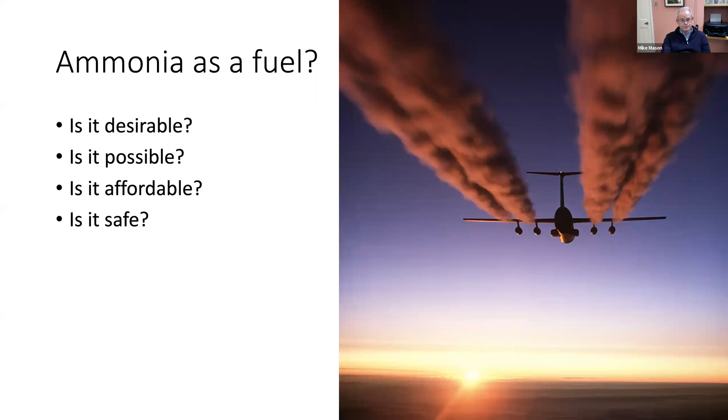Is it desirable? Well, this is why it's desirable, of course. Climate change, we all know climate change is a rolling catastrophe. It's on us already. And what's the problem? Well, we're already suffering from severe problems, and yet we're only just over 1 degree centigrade above pre-industrial temperatures. The IPCC is setting some targets. It produced a report around exceeding more than 1.5 degrees above background temperature. And even that is probably too dangerous, but it's an acceptable target. But we're bound to overshoot that. We guarantee we won't hit that without having to do a little bit of a reverse.

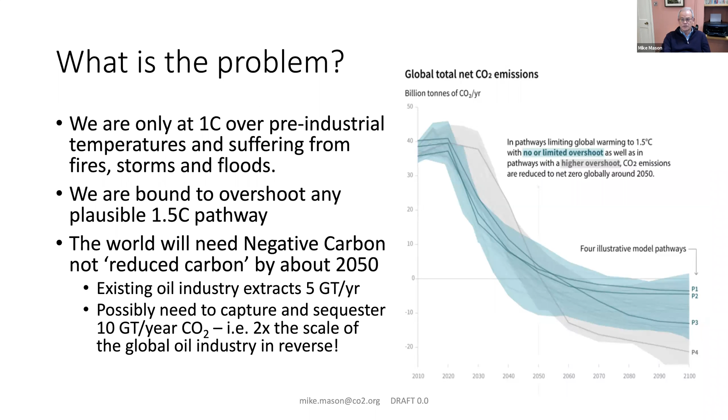But it's more than CO2 if you're talking about aviation. NOx is an issue for turbines. It's a real problem. And we have a massive uncertainty around cirrus clouds. Ice in these clouds has a huge impact on radiative forcing, and it's largely seeded by the soot particles in combustion gases. So anything with carbon in is going to be a problem there.

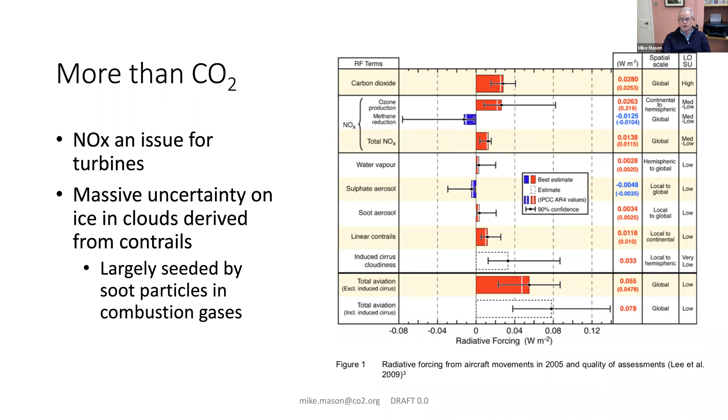So what possible energy vectors have we got for the future? Well, on the top right, you've got kerosene. The scales here are logarithmic. You've got volumetric energy density up the y-axis, gravimetric on the x. Batteries are way too low. Future possible batteries are there, that purple mark. They're not actually likely to have much of a role outside a very limited amount of recreational flying.

Hydrogen's really interesting. There's liquid hydrogen, way off the scale in terms of gravimetric energy density, not bad in terms of volumetric energy density, but that's a liquid at 20 Kelvin. If you want to actually store that sensibly, you end up here. So that's the US government target for practical storage of hydrogen. And you can see that it's a long way from where kerosene is. So hydrogen might have a role in some aircraft, but it's nowhere near as good as kerosene.

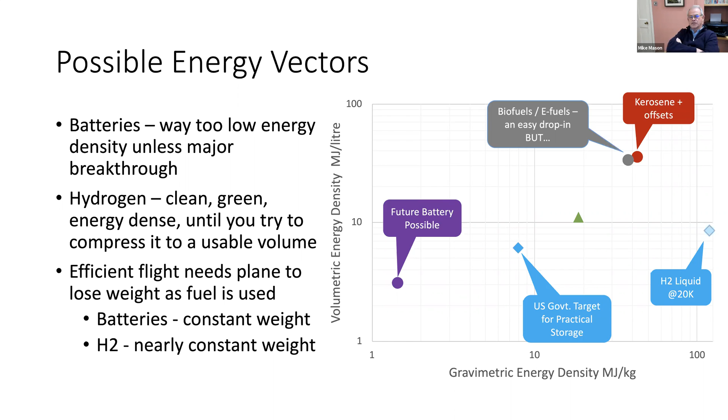So then this is the one that I hear so often being repeated by the aviation community. Ah, yes, but we'll use biofuels, we'll use e-fuels, synthetic fuels. They're an easy drop-in. But by 2040, 2050, we're going to be, as I said, negative CO2. Hold that in your mind for a second. Every ton of a carbon-based fuel emits 3 tons of CO2. Let's ignore, conveniently, the radiative forcing created by contrails and NOx and all the rest of it.

3 tons of CO2. If I just look at business as usual emissions projected for somewhere around the 2040, 2050 time horizon, they are going to be, from aviation, 2 to 4 billion tons a year of CO2. Now, if we've already got to capture and bury 10, this adds 20 to 40% to the global CO2 capture needs. And remember, that's almost as much as the entire oil industry today. This is a huge ask. It's going to be very difficult to do.

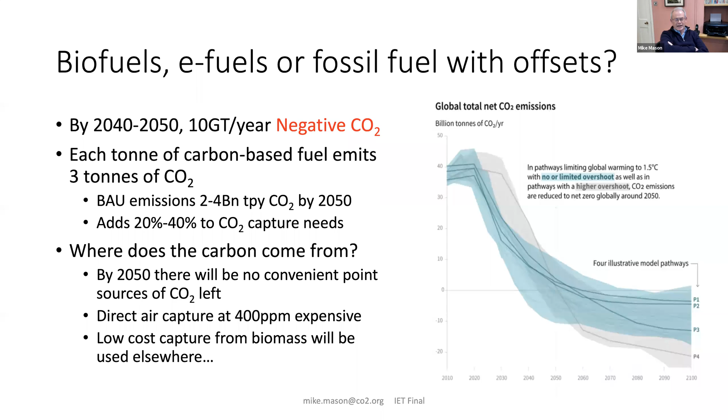Where does the carbon come from? So people say, oh yeah, but we can use flue gases, we can use this, we can use that, we can use the other. But by 2050, there will be no convenient point sources of CO2 left. There won't be any flues, there won't be any steelworks producing it, and cement works will have to bury their own CO2. So that says, well, maybe we can use biomass. Biomass is our get out of jail free card. We can capture it with biomass.

Except, let's just contrast 2 different approaches here. One is to use oils directly. So a ton of palm oil is roughly equivalent to a ton of biofuel. I don't really mind what you get it from. Palm is the most efficient source of oil. And what we see is that because you end up having to deforest, in essence, every incremental ton of vegetable oils has a total CO2 emission penalty of 11 tons. So not 3 tons that you have to capture, it's now 11. And of course, you also have the biodiversity losses. I don't think anyone's going to let you do that at any kind of sensible scale.

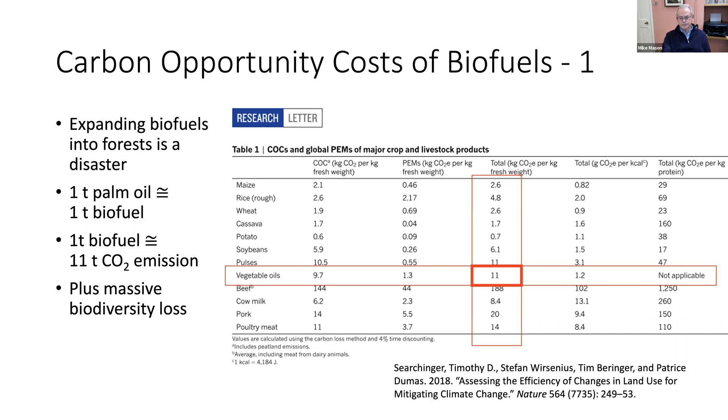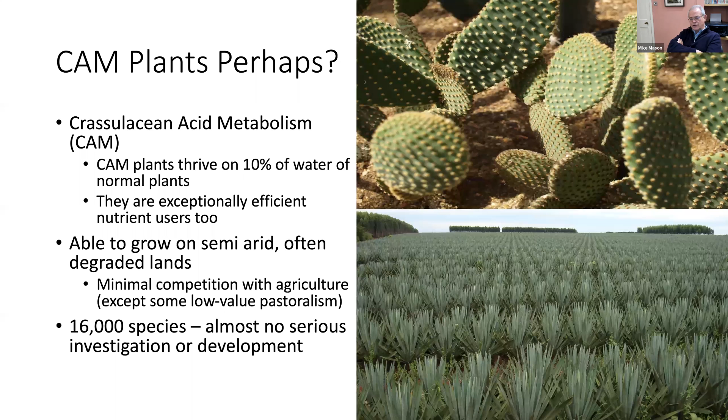So as Sean said, my DPhil was in microbiology, and I was looking at CAM plants. This is a really interesting group of hyper water efficient plants. They grow in semi-deserts. They're cacti, they're sisal plants, they're agave. You might know Agave tequilana is used for making tequila. They're incredibly efficient nutrient users. There's lots of land we could grow them on, and there's 16,000 species, and we probably only really learned how to commercialize 3 or 4. But they too have their opportunity costs.

Anything that we can ferment, we can convert to protein as an animal feed or even as human feed. And we do this bacterially. There are various Ralstonia species which produce 70 to 80% of their dry biomass weight as protein. And this is a good protein. It's more or less equivalent to casein milk proteins.

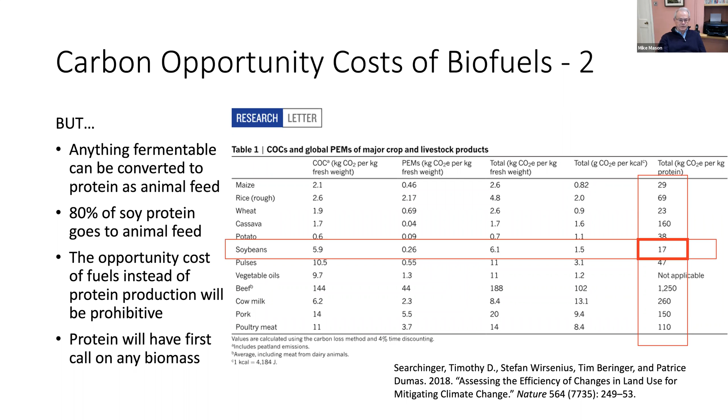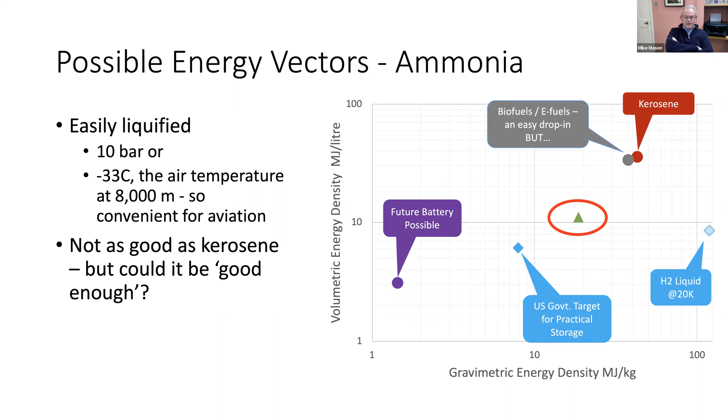So that leaves you with the last of the potential energy vectors, which was ammonia. It's very easily liquefied, 10 bar or minus 33 centigrade. It's not as good as kerosene, but the question is, could it be good enough? So is it possible?

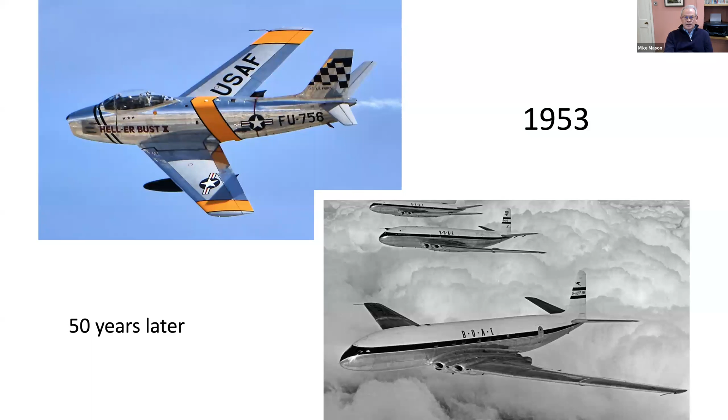1903, that was where we had. 50 years later, we were into the jet era. It is astounding the transformation that you can create in the space of 50 years. Another 50 years later, outside commercial civil aviation, we were doing some other really quite exciting things. On the other hand, in the 50 years from 1969 to 2019, we added a few windows on the top deck of a jumbo jet.

The trouble with civil aviation is that you're sitting on the peak of a mountain, and almost every development that you do takes you downhill. It is very difficult to improve on what you've got without essentially getting off the mountain and moving yourself onto another one. It needs some very substantial change.

So what I've done is I've built an indicative model. This is not a prediction, it's not a plan. It's a possible roadmap to truly sustainable aviation, just to demonstrate that in principle, these things are possible. So I've taken an A320 B737 class airplane. I've presumed moving it from turbofan to propeller.

That plane there is a Bristol Britannia. That's actually the second plane I flew on. The first plane was a DC-3, and then we used to fly on these. Beautiful airplanes. To do that, though, you'd probably need to drop the speed from about Mach 0.85 to about Mach 0.45, 480 kilometers an hour, 300 odd miles an hour. You could probably go up a little bit higher than that.

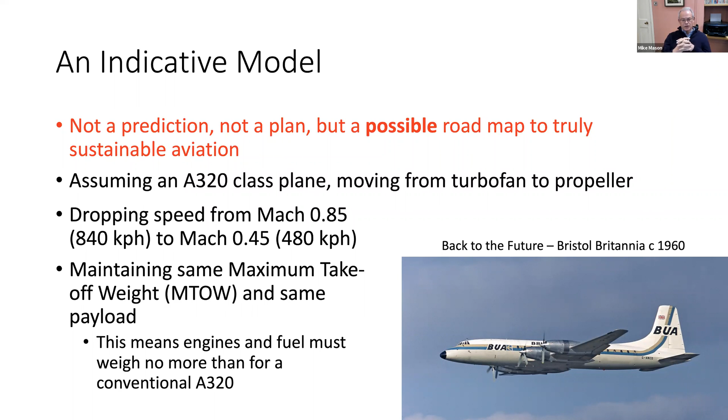Let's assume we have to have the same maximum takeoff weight, the same payload, and fundamentally the same aerodynamics. I mean, the positioning of engines and things will change, but I'm not for the moment assuming any dramatic changes in the aerodynamics. So your engines and fuel must weigh no more than for a conventional A320 if you're going to carry the same payload.

So what do you have to do to adapt to ammonia? Well, ammonia has 40% of the energy content per kilo of kerosene. If you're going to electrify that, solid oxide fuel cells, which are capable of turning ammonia into electricity, are currently quite heavy, though actually, in truth, nobody has ever asked the solid oxide industry to lightweight their fuel cells. If you swapped out steel for titanium, if you halved the thickness of it, if you did all sorts of things, I think we could go from about 0.3 kilowatts per kilogram up to a kilowatt per kilogram without too much dramatic change.

PEM cells are a lot better, proton membrane cells, but they're destroyed by even traces of ammonia, so they're challenging. If your fuel cells are heavy, however, you have a problem, which is that you want to size them for the cruise when you're not using as much power as in takeoff. Your takeoff power is severely limited by the mass of cells, so that's a challenge.

So what are the fixes? Well, the first, as I've said, is I think to move to propeller rather than jet, which increases your propulsive efficiency. You also need to move to electric power rather than combustion in the cruise, because that increases your mechanical and thermodynamic efficiency. And I'm postulating a hybrid solution using a turbine, an APU, basically to generate more power during takeoff and climb. You could burn ammonia, you can do all sorts of things. I'll talk more about that in a moment.

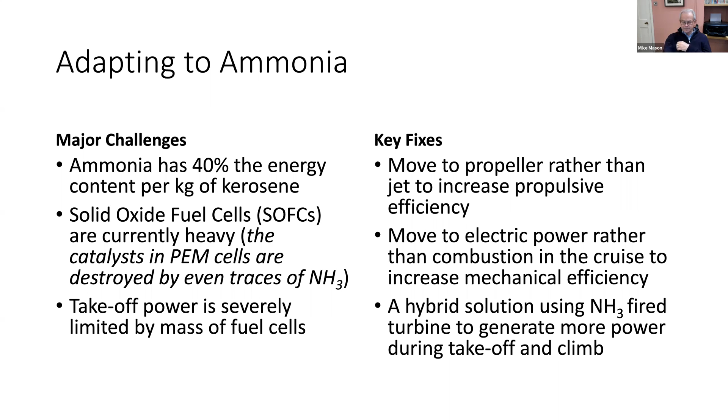So here we've got two graphs. On the left, we've got comparative energy use in megawatt hours per 1,000 kilometers per engine for your A320. On the right, we've got the same data turned into mass. If you look at the left-hand graph, we've got three things: a turbofan, 60% fuel cell efficiency, and 70% fuel cell efficiency. And you can see the delivered energy in each case is the same.

The propulsion losses are lower for the fuel cell approach. Electrical mechanical losses are tiny for the fuel cells and huge for the fan. And the fuel cell losses are there.

Convert that to a mass flow at 60%, which is, I guess, where fuel cells are likely to be today. What you see is that the fuel cell approach requires a much higher mass flow rate than burning kerosene. You won't get as far with the constraints we've put on it. At 70% fuel cell efficiency, you're pretty damn close. 70% takes you almost to where you need to be.

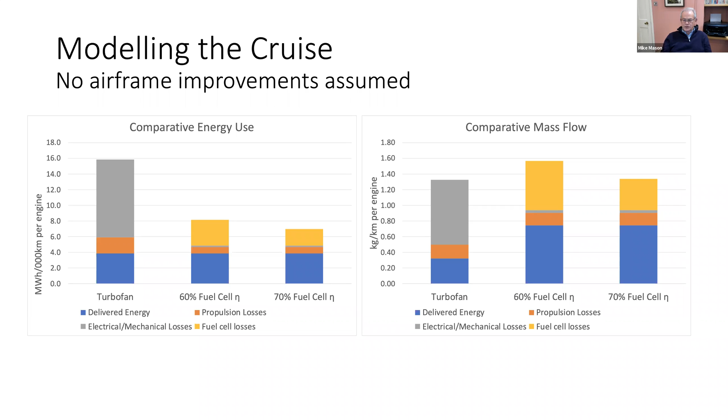Takeoff and climb, though, is a major issue. You need additional power to gain height, which is proportional to the rate of climb. You can get that from electric motors. Electric motors are not a problem. They're incredibly power dense, and frankly, you can run your electric motor way over its nominal power rating for a short while. It just gets quite warm. So long as you cool it off afterwards, you're all right.

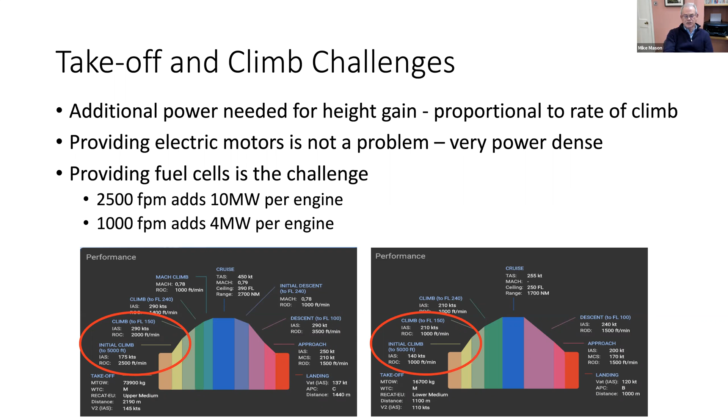Fuel cells are the challenge. At 2,500 feet a minute climb rate, which is typical for that class of plane, you need to add 10 megawatts per engine compared to the cruise. Whereas if this is an ATR or something, a little turboprop at 1,000 feet a minute climb rate, you only need to add 4 megawatts, which is a much more reasonable amount. So you're probably going to end up with a much slower climb, but it'll be a quieter climb.

The simplest solution to that extra power, I think, is probably a turbine, somewhat similar to an APU. It could burn ammonia. There might be an emissions problem without an ammonia to hydrogen cracker. The problem with burning ammonia is that for a brief instant, you have nitrogen free radicals hanging around where there's oxygen. The thermodynamics drives the reaction towards N2 plus H2O, but these are equilibrium reactions, and you may well find yourself with a little bit too much NOx in the exhaust.

Interestingly, if you just introduce a little bit of ammonia in the back end of the exhaust, the ammonia reduces the NOx back to nitrogen, but that's a separate approach. You could even burn a little bit of biofuel or e-fuel because you only need a relatively small quantity. Efficiency isn't a major issue there, since you only need it for 20 minutes of the flight. So your fuel and efficiency are much less important than for the cruise. And of course, turbines have a very high power to weight ratio.

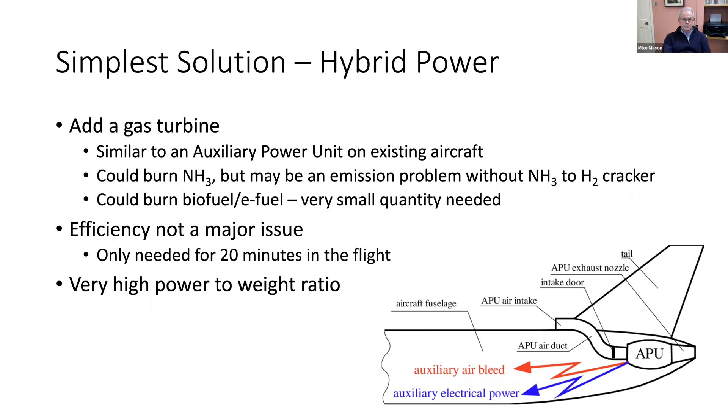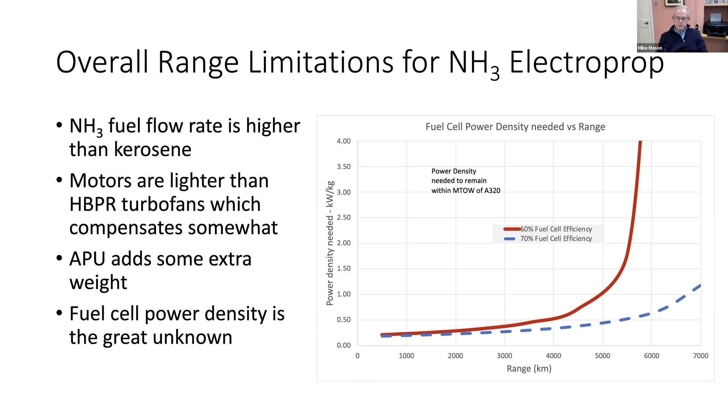No reserves clearly in there, so take it with a pinch of salt. Push the fuel cell efficiency up to 70%, and you're talking about a range of almost 7,000 kilometers. That's quite a big difference. In practice, that's what it means — you can get an awful lot of the world included in your range.

So the prize is huge. It would be quieter, it would be non-emitting. Aviation could become the most sustainable form of transport. You don't need much land take, a lot less than rail or road. No intrusive noise, and it'll be a lot faster and safer than all the alternatives. It's flexible and responsive—once you've built your railway, you can't move it tomorrow because demand patterns have changed. And it has unlimited growth potential. You could move aviation from ecological, environmental pariah to a saint, a savior.

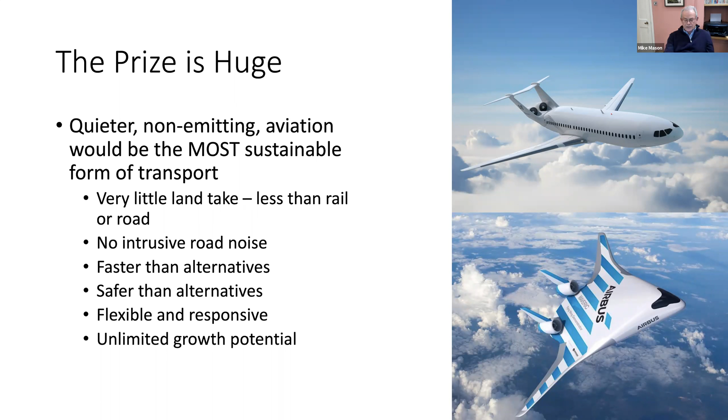Range is lurking there as an issue, but I'm going to be bold and say we've got to move off our mountain onto another one.

I've got a little commercial drone from DJI, and I can position it within 100 millimeters in 3-dimensional space at the touch of a button. The software for doing these things is easy.

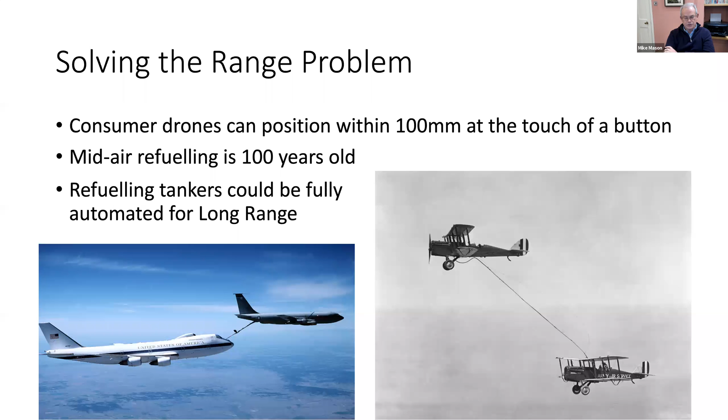Mid-air refueling—look at the picture on the right, it's 100 years old. And the President of the United States, bless him, flying in Air Force One, regularly refuels. It's safe enough for him, it's probably safe enough for everybody else. Don't underestimate what artificial intelligence, increasing computer power, and vastly improved control systems will do to safety and our ability to do things like this. It's not as silly an idea as it might first seem.

So then is it affordable? It's all very well having the technology, but who's going to pay for it?

The cost of ammonia is mostly electricity, and then it's the cost of electrolyzers. To make green ammonia, you take water, electrolyze it to produce hydrogen and oxygen, then combine the hydrogen with nitrogen from the air in a process called the Haber-Bosch process. That's 120 years old and pretty efficient, though quite capital intensive.

Solar power in sunny deserts is already $13.50 a megawatt hour—fairly low cost. Perovskite tandem cells are being developed at the moment. They'll probably be launched this year, and they will reduce the cost of solar power to less than $10 a megawatt hour by 2030. That's almost free.

Generation 3 ammonia is really interesting. This is coming out of a lab at Monash University in Melbourne, Australia, led by Doug MacFarlane, and he's developed a technique for producing ammonia directly in the electrode of the electrolyzer. So the whole Haber-Bosch process goes away.

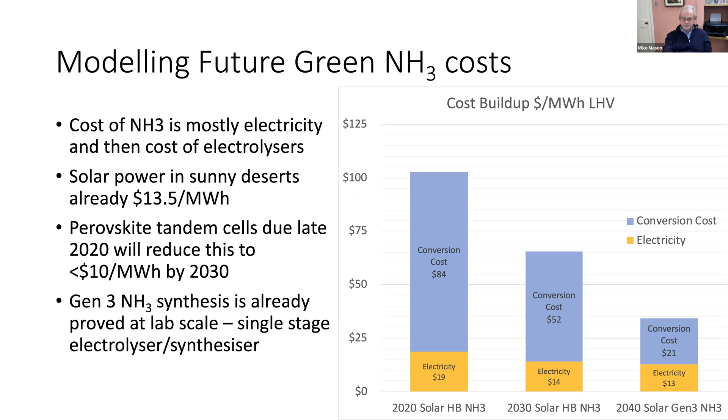So what does that mean for your aircraft? The inset graph at the bottom shows the fuel cell efficiency, a reminder of what is making this happen. On the graph on the right is the delivered energy cost, bearing in mind the different fuel cell compared to combustion efficiencies. I've used 60% efficiency.

You've got 3 lines there and 2 dotted lines. The red dotted line is kerosene without any CCS today—that's a 2020 price. Kerosene today is unbelievably cheap because nobody wants to buy it, since no one's flying their aeroplanes, so aviation fuel is almost being given away, but that's the price today. The green dotted line is the price of kerosene with $100 a ton of CO2 added.

The purple line shows you the cost per megawatt hour of delivered energy at a given cost of capital for producing that delivered energy, shown on the x-axis. You can see that ammonia is today more expensive than kerosene, and it would need a fairly chunky carbon price to make it viable.

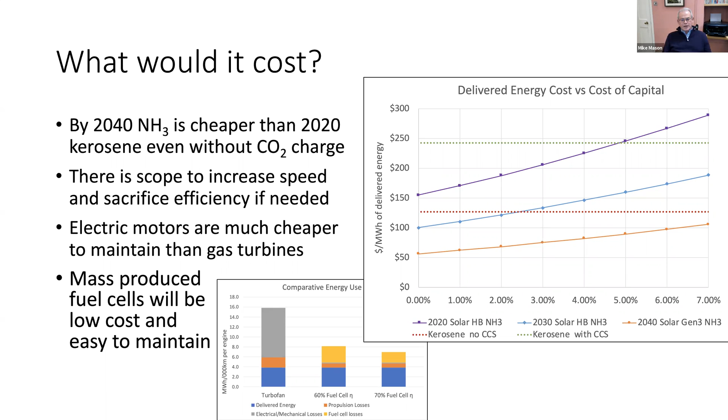But of course that's not the only thing. Fuel is a huge part of this, but electric motors are not like big gas turbines. They're dead cheap to run. They don't need maintenance—either they work or they don't work. Fuel cells have very few moving parts; the fuel cell itself is solid. So I suspect maintenance is also going to come down dramatically.

So there is the case for doing it and for paying it. The really difficult question is: is it safe?

The first thing we have to think about is fire. Since the explosion in Beirut, I've had countless people saying to me, yes, but that was ammonia, wasn't it, that blew up on the docks in Beirut? No, it wasn't—it was ammonium nitrate. I'm originally, as Sean said, a mining engineer. Ammonium nitrate is an explosive; we used it to blow up things.

Ammonia itself is almost completely non-flammable. It requires a high ignition energy and has a very narrow flammability limit. The quote there is from the IIAR Handbook of Ammonia, which notes that ammonia is designated as a non-flammable gas for shipping purposes by the United Nations and the US Department of Transportation. It is very, very difficult to set ammonia on fire by accident. Being a gas that's lighter than air, it diffuses readily, so it's very difficult to create a flammable situation outdoors.

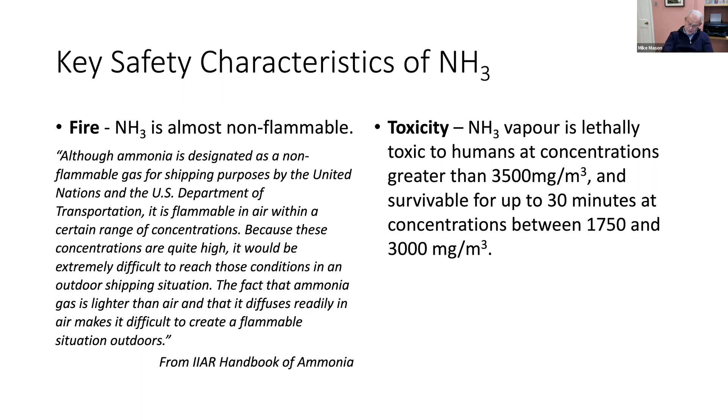Fire risk is dramatically reduced compared to kerosene. So in accidents at height, or accidents with no survivors, ammonia poses no additional risk. There are two types of accidents that really matter: survivable crashes, and crashes into populated areas. The key questions are, how large are the risks and can we mitigate them?

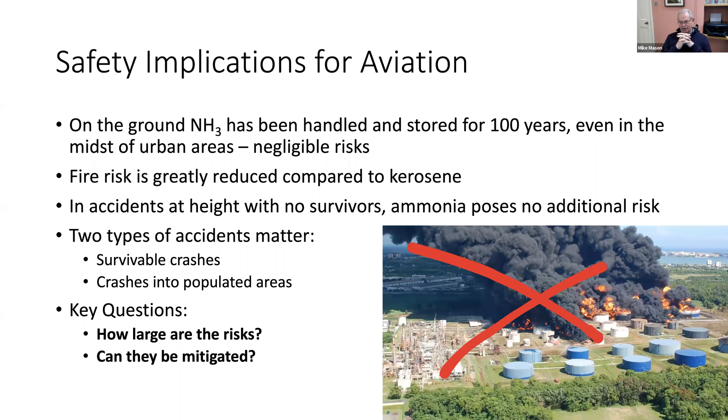As an answer to this, over the last lockdown I analysed every single civil aircraft and cargo aircraft crash over the last 20 years, 2000 to 2019 inclusive. It was clear, first of all, that trying to do this per billion passenger kilometers was the wrong metric, because nearly all the crashes happen on arrival and landing, or on departure, takeoff and climb. So it had to be per passenger journey.

What we can say is that regardless of fuel, the risks are falling fast and will continue to do so. Any ammonia-powered aircraft will be new, and will benefit from massively improved AI, control systems, and the increasing reliability of electric motors. Unlike a combustion motor or a jet, where increasing the size increases the efficiency, there's no efficiency gain from going bigger and bigger with electric motors—so there's no particular power-to-weight ratio gain from scale. That means you can easily have half a dozen 3-to-4 megawatt motors distributed across the aeroplane rather than two large combustion engines.

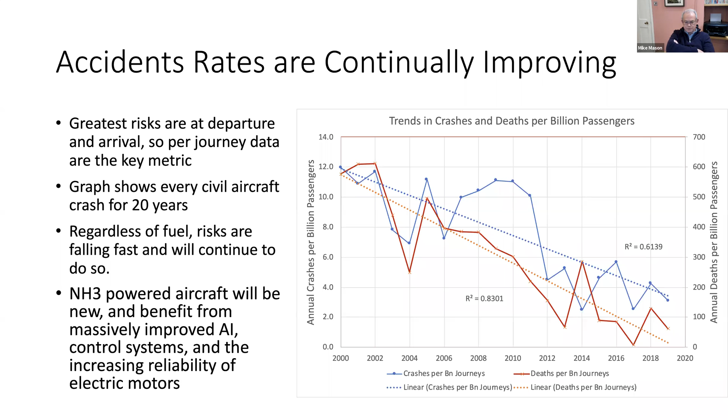Looking carefully at the risk in survivable crashes, because we've already agreed the unsurvivable ones aren't really important, and looking at those where there were survivors at risk, there are an awful lot you can eliminate because they're runway excursions with minimal or no fuel tank damage, so no survivors at risk in particular. Many crashes involve fires. It was remarkable how often in the crash reports you heard rescuers on the ground saying they could hear people alive and couldn't get in because of the fire. This we can dismiss as a problem for ammonia.

If you look at the table on the right, I've simply and crudely extrapolated the decadal change in the number of crashes, deaths, and on the right column, focus on survivors at risk, extrapolated for the next three decades. In 2040 to 2049 it gets fainter because, as you go further into the future, you're less and less confident. But taking those numbers at face value, you've got something like 10 to 15 survivors at risk per billion journeys in that period.

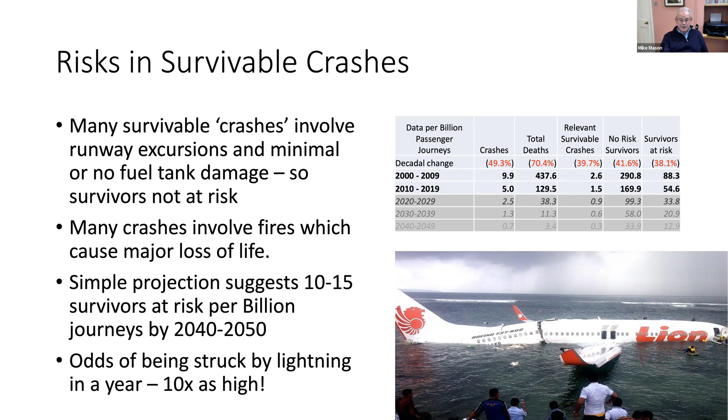The odds of being struck by lightning in a year are 10 times as high. So this is not a real risk we should be frightened of. It's a risk, and we will have to try to mitigate it. We can mitigate it, but it's not a showstopper.

Much the more serious risk emerges as being the risks in urban crashes. And relevant urban crashes are not reducing. I don't have hard evidence for this, but my guess is there are two reasons: one is that the number of flights is just increasing, and the other is that those flights are increasing most rapidly in places with the least infrastructure, safety culture, and the like.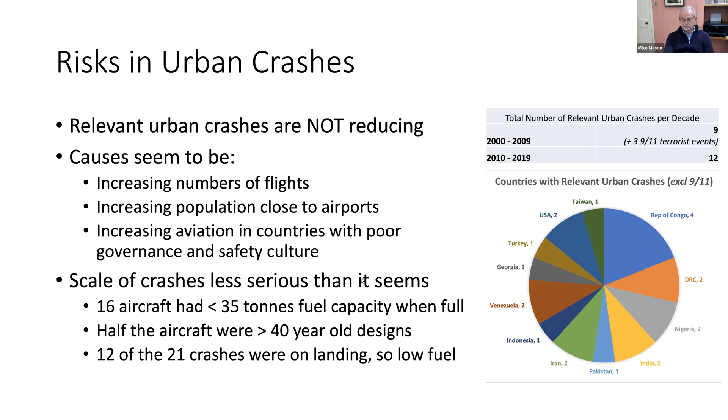Nonetheless, we do have to mitigate the risks. So there are two risks with ammonia vapor. One is a toxic plume developing from a simple spill, a vast pool of ammonia coming out of the tanks. Liquid ammonia, however, has a very high specific heat and a high latent heat of vaporization — it doesn't vaporize very easily.

So imagine your crash site is 200 meters long, 50 meters wide, and you've spilled the fuel evenly across it — the worst possible case. Your maximum evaporation rate would be less than 2 kilograms per second if the fuel was at -77. It would take 10 minutes to evaporate a ton.

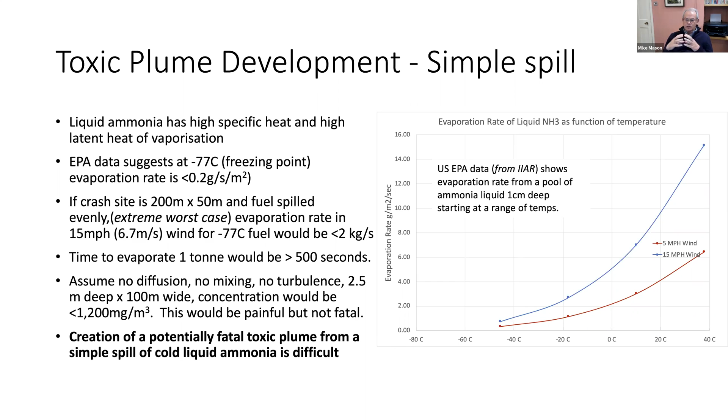So what you can say is that creation of a potentially fatal toxic plume from a simple spill is really hard. There is a much bigger risk, and it's the formation of mists.

In the 1940s, after the Second World War, there were a lot of spare aeroplanes lying around. So the US, the predecessor to NASA and the FAA, went and crashed a whole lot to look at how they could improve fire safety. And what they realized was that the big problem was the formation of a mist in the 0 to 20 or 30 seconds after the crash.

One of the other things to note is that small droplets increase vapor pressure and enhance evaporation rates. So now suddenly you've got a huge surface area. You still, of course, don't have any more heat in the air - it's very difficult to evaporate it - but you have got conditions working against you.

So the greatest risk with ammonia probably comes from ammonia in post-crash misting, in an urban crash, creating a toxic plume. It's very difficult to model. It needs some experimental work, and I'm hoping to do some of that shortly.

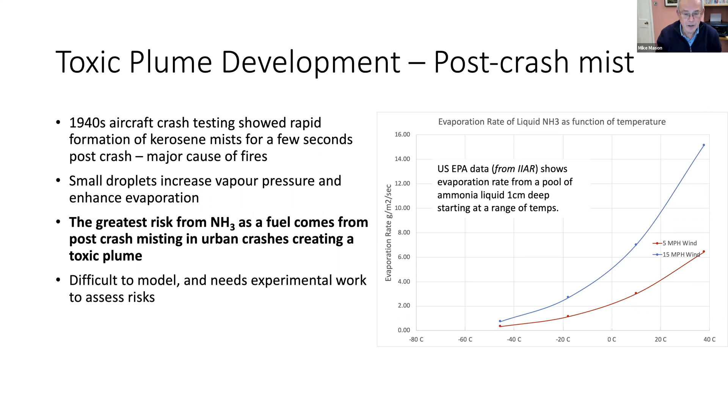So that's the real risk. We have to mitigate that one. Of course, mitigating that one will mitigate all the others as well. And I'm going to propose 3 approaches.

One is just fill the tanks with a foam. Foam-filled tanks have been used by the military for a very long time to stop fuel sloshing around, to reduce fire risks, to reduce in-tank fires and explosions. If you have multiple compartments, and if you surround the tank with a fiberglass layer - just loose fiberglass, not in resin or something like that - to act as a coalescer for droplets, that would make a huge difference, and you would get a very limited amount of misting, I suspect.

Option 2 is a really interesting one. Put your ammonia into the tank with or without foam as an ice slush, and then freeze it by passing some liquid nitrogen through. And you could have a loose matrix of fibers in the tank to hold it together. Solids don't form mists, and of course you've also got the latent heat of fusion to take into account. This becomes a very stable fuel. And you can scavenge the liquid ammonia off, or the solid ammonia, with liquid ammonia to feed into the engine.

A very interesting approach. And then the other one that is also interesting we should be aware of is rheology modifiers. Everyone will now know about hand sanitizers - you put some on your hands and it's quite gloopy, but actually it's 70 to 75% ethanol, or it might be isopropanol, but one of those. And it's gloopy because a tiny percentage of a rheology modifier has been added to make a sort of honey-like consistency. It's very difficult to make a mist out of honey. And so one thing that I think we probably need to explore is whether we can use rheology modifiers for liquid ammonia to make this sort of honey-like consistency.

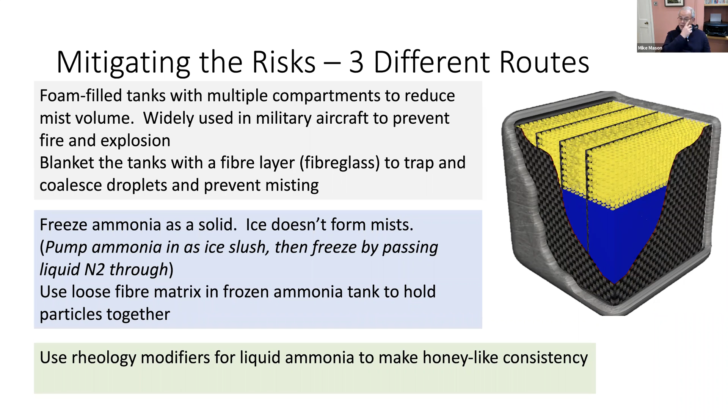What about the passengers? Well, I don't think there's a serious risk there, but of course, you can give passengers a mask. Ammonia is incredibly easy to neutralize - citric acid does the job. Ammonium citrate's a perfectly safe product, it's actually a food preservative. And I did a sum: sort of 75 grams of citric acid in those little blocks on the side of your face mask could give you 15 minutes of safe breathing at up to 40,000 milligrams per cubic meter.

I'm not aware of any lives that have been saved by the life jackets that we all have to practice using, or watch the stewards and stewardesses using. Masks might be much more useful. I just leave that one as a thought for the safety people.

Environmental risks I need to quickly deal with. Ammonia leaks could disturb the global nitrogen cycle - it's a major issue for fertilizers - but other than a rare gross leak, ammonia as a fuel is not a serious risk. You can smell it so easily that leaks are easily detected. NOxes, I say, are powerful greenhouse gases, but they can be avoided in fuel cells.

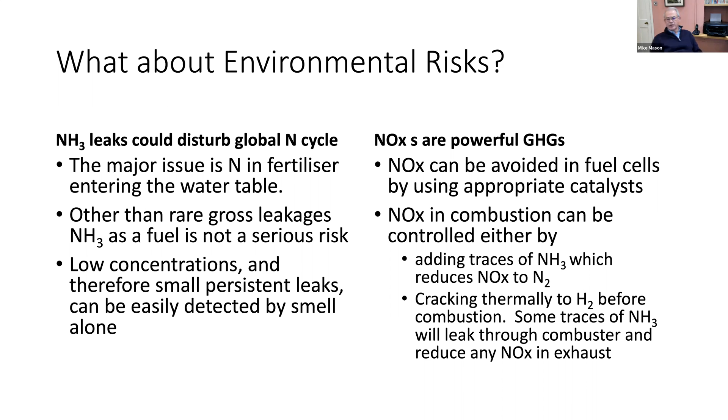In combustion, we can avoid NOx by adding a trace of ammonia at the back end or by cracking thermally before combustion. So I think we can handle both of those. So where does that leave us? Well, is it desirable? Absolutely. Ammonia is a really rare, sustainable fuel. There aren't many others.

If you cast your mind around the periodic table and think, well, in an aeroplane, lift and drag are intimately related. I want to reduce the weight so that I reduce the drag, so I reduce the thrust, so I reduce the amount of energy I need. I need a fuel which, when oxidized, I can throw away. There's not much you can throw into the atmosphere. You can't throw silicon, you can't throw boron, you can't throw carbon. Nitrogen's about the only thing.

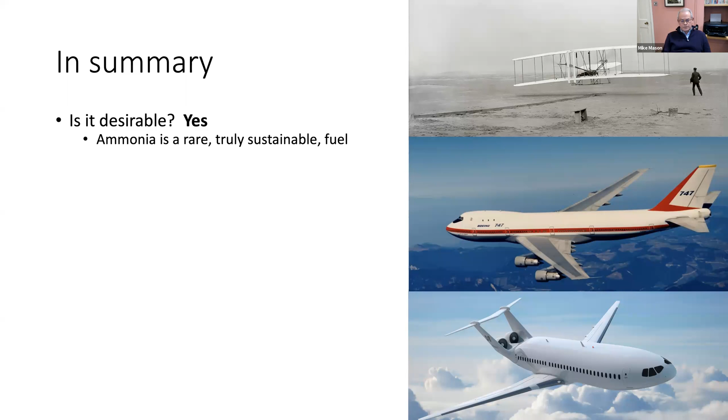Is it affordable? Well, I believe it will be. I think it will be cheaper than biofuels, cheaper than e-fuels, and even cheaper than kerosene is today. Is it possible? I think so. I think there's R&D to do. It's not a done deal, but it's a really, really promising approach, which I think is grossly underestimated and under-researched.

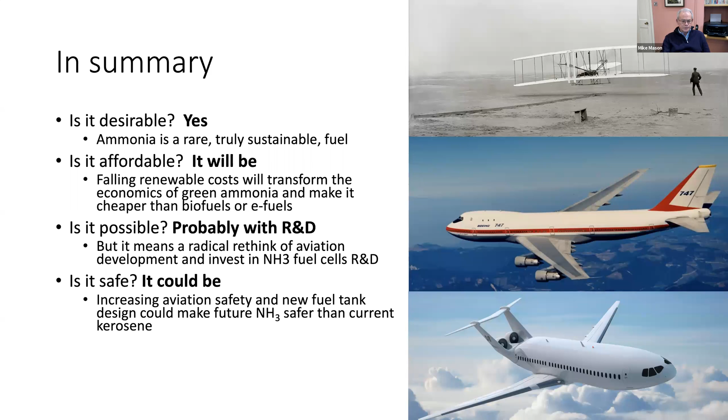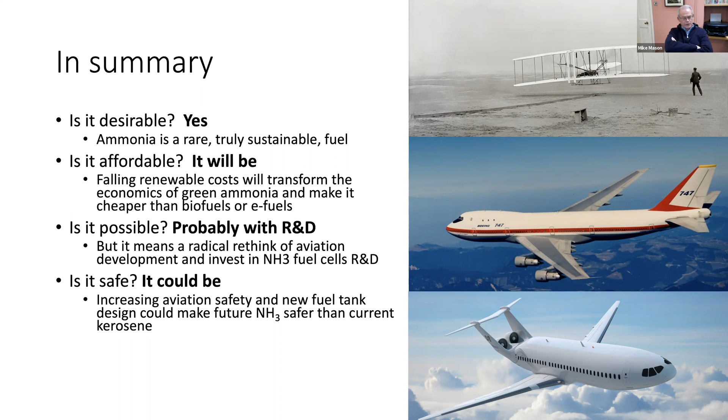Is it safe? I think it could be. I think it could actually be safer than kerosene. I think fire is a horrible thing, and we can avoid fire, and with decent fuel tank design, with careful thought about how we handle fuel, whether we use rheology modifiers, whether we use it as a solid, we could make ammonia safe. Aviation, therefore, could become the most sustainable form of transport that we have, other than the bicycle.